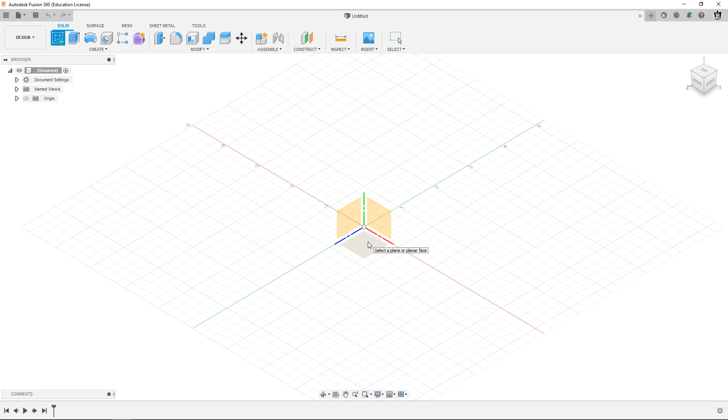We got a new design here. We're going to create a sketch. I'm going to go to this bottom plane XZ because that's how the parts will be cut on the laser. We're going to go in and make a rectangle first. Let's do 6 inches wide, 1.5 high. You can go a little bit bigger on the height. Can't go bigger on the width though, in order to save material.

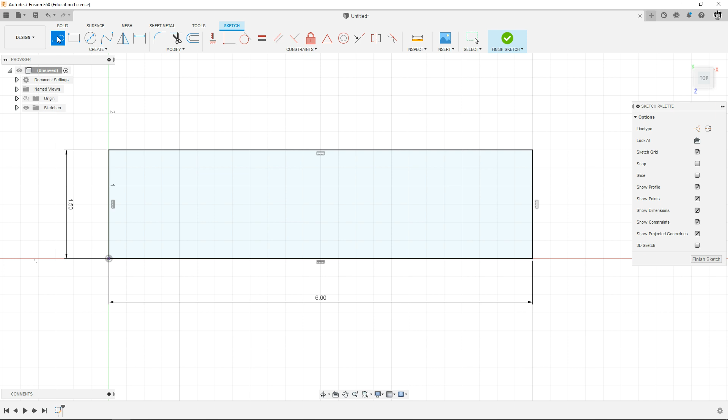So we got this here, and we want to put some lines on here. So we're just going to hit the line tool, go down here near the origin. I'm zooming in, and I'm just going to draw a line 0.1 tall. There we go. All right, this is going to be my 16th of an inch line.

So I need to dimension it with respect to the left edge of the ruler and make this 1/16 of an inch, 1/16. Don't type a decimal. 0.063 is rounded off to 3 decimal places. The real answer to 1 divided by 16 equals 0.0625. It rounds it to 0.063 to save space, but in its mind, it knows that it's exactly 0.0625.

Last semester, a lot of people typed in 0.063 and all of their rulers were off and they had to redo it, and it was sad. So make sure you do the fraction there, 1/16.

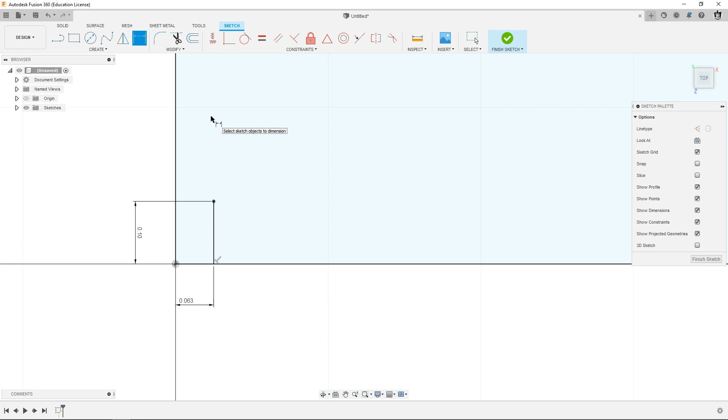Okay, we got one line. We need to make a lot more. So instead of drawing all those lines one by one, we're going to create a rectangular pattern. So we're going to select our objects, select the line. Then we're going to click direction here, select that, and pick this horizontal line because we want our pattern to go to the right. We're going to make a pattern of these lines.

The distance type we want is spacing. Make sure you don't have extent or you'll have a bad time. The quantity is how many we want. We want 6 inches, and these inches are, there's 16 of these per inch. So it's 6 times 16, that's 96.

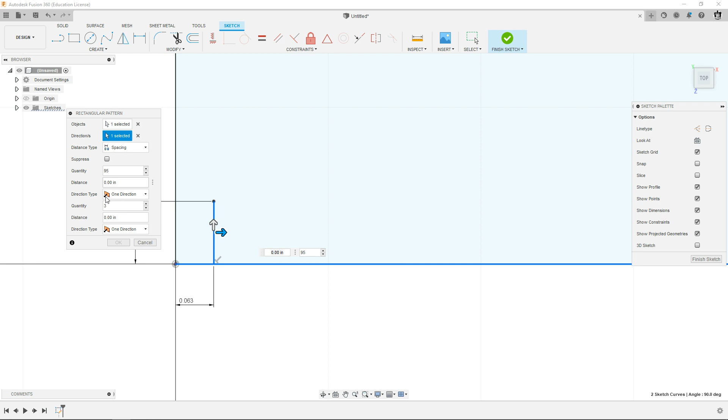However, we've already made one, so we can just put 95 instead of 96. And then our distance is going to be how far apart the lines are. That's 1/16. Okay, and you can see it makes a pattern. Zoom out and look at it. Make sure the pattern fills up the ruler and doesn't go past.

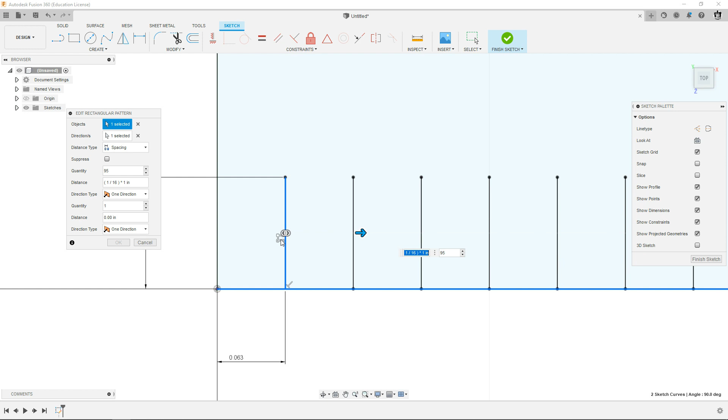When it makes these patterns, it puts this constraint on here. This is a rectangular pattern constraint. You can always double click this, or right click edit, and it will let you change it in case you made a mistake. But this is good to go.

Now I'm going to do the 1/8 of an inch line. Get my line tool. This is 1/16. This is 2/16. 2/16 just rounds to 1/8 if you reduce it. So I'm just going to go here and put 0.1. That's going to be my line for 1/8.

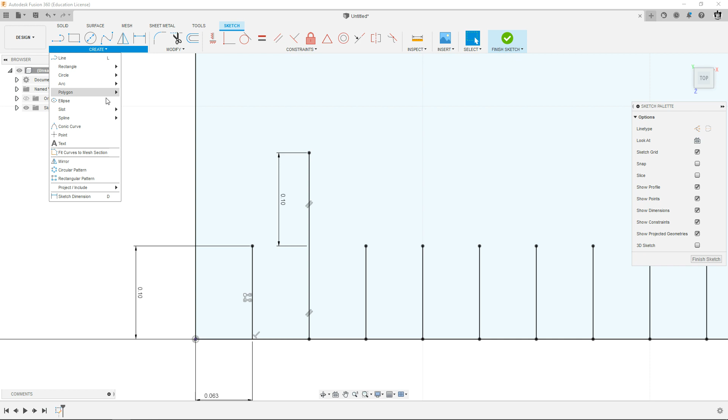Now I got to make a pattern of these, create rectangular pattern, click on that line. Got to put the quantity I want. There's 8 per inch, so 8 times 6 is 48, minus 1 is 47. And then the distance between them is 1/8. Okay, hit OK. You can see it's making a line, every other line.

Cool. Now we're going to do 1/4 inch. Well, 1/4 inch is 2/8. So all I got to do is go here to the second 1/8 line, go up here, 0.1, and then pattern again.

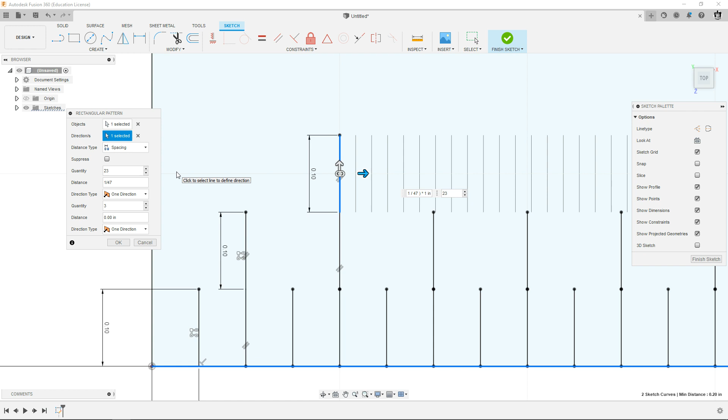Same deal with object and direction. Quantity, it's 1/4 of an inch, so 4 times 6 minus 1, 23. Distance, 1/4. Oops, there it is, 1/4. Hit OK. And you can see every other 1/8 line is now a tall 1/4 line.

Now we're going to do 1/2 inch. Well, 2/4 is a half. So right here is where I start. 0.1, create rectangular pattern, pick that line, your direction, use the bottom edge again. It's 1/2 inch. 2 times 6 is 12, minus 1 is 11. Distance is 1/2. You could put 0.5 also.

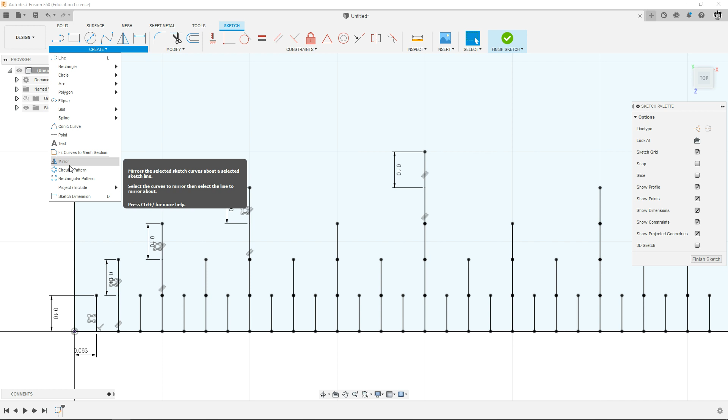There we go. Now we're ready to do the 1-inch lines. There's going to be 6 of those, but we already will have one. We're going to start right here at the second half line. Create a rectangular pattern. And for this one, you only need 5 of them, and they're 1 inch apart.

So looks good here. I'm going to finish the sketch, zoom out, look it over, make sure everything looks right. If it does, you can save it, call it the ruler, and then go on to the next video. I'll show you how to do the numbering.